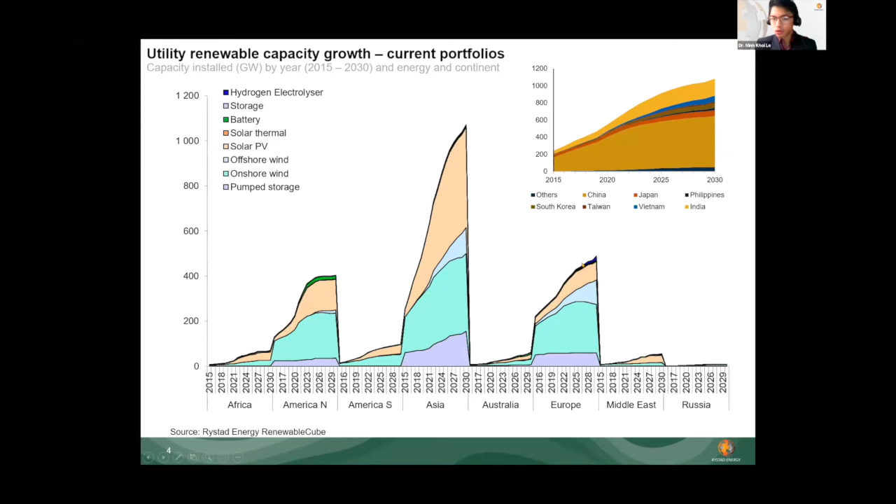Now you might see that, okay, we have hydrogen electrolyzer here, and it still has very small growth among all the regions, but you do see it coming up in Europe. And actually, when you take that part out of the mix here and just take a look at hydrogen electrolyzer, how do we see it grow in the future?

From the current projects that received financial close, FID, and the current projects that are in a very advanced stage, we still see them at a smaller scale. And that's why, until 2025, with cost still high and those challenges, we see it only reaching about 6 GW, but it can really ramp up after that, especially reaching quite a high number in 2030.

Keep in mind that some of this target and committed spending from countries, especially in Europe, for example looking at 40 GW by 2030, we still see cost being a challenge here, and we might not be able to get there in terms of the target. So if there are some positive changes in the cost of electrolyzers, but also the cost of renewables decreasing, then perhaps we can see this grow a bit more. But we do see a lot of countries already have committed spending in this regard.

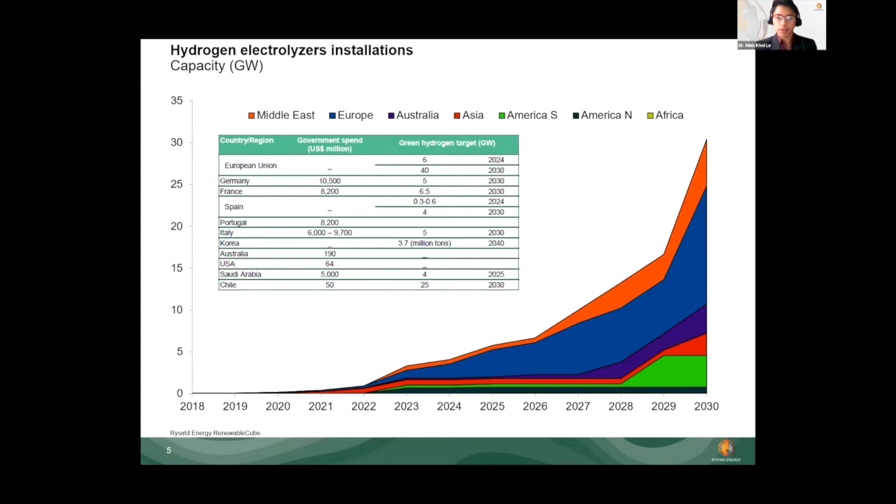We haven't seen much in terms of how they want to split this spending, whether to incentivize the demand side, or how much they're going to give in terms of grants. For example, we do see some grants coming out of Australia, but in other regions, it's still waiting to see how exactly these billions will be spent.

Taking a look here, if you plot the hydrogen electrolyzer facilities on a map, like we did before with other forms of renewable energy, we see the center being Europe, Australia, and a few more in the Middle East. But in contrast with what we saw before, with the renewable center of the world in North America and Asia, we don't have a lot of currently announced and committed hydrogen electrolyzer projects in the Asia region and North America.

In North America, with Biden coming in now, you might see a bit more, but blue hydrogen still represents very strong competition there. In Asia, you have quite high cost of renewables in certain countries like Japan and South Korea, and that's exactly why they are looking into other markets in terms of an importing scheme.

One center that we see is somewhat missing from this picture is China. Currently there's only about a 1 gigawatt size project in China that has come up, with a few other projects in the 100 megawatt range. These projects are quite few in number.

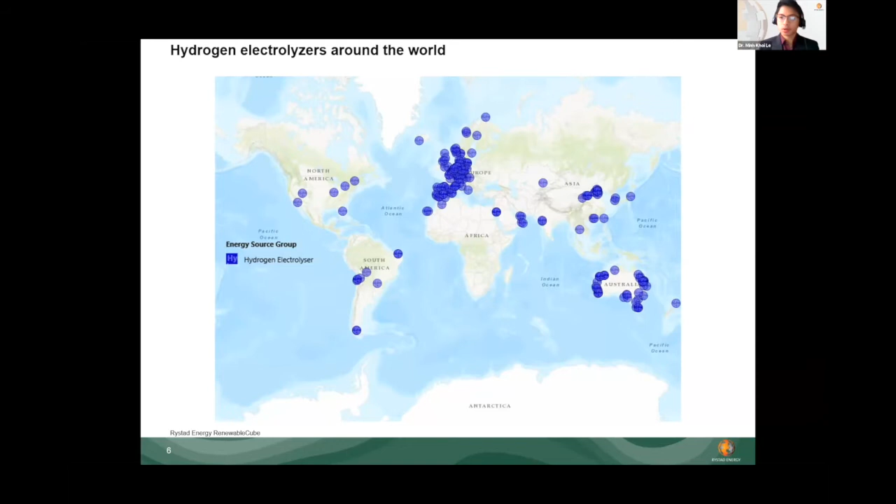But what's coming up now at the end of this month, and already in the plan for certain provinces, is the next 5-year energy plan. This is what we think will lead to a lot more facilities being announced, especially in regions such as Inner Mongolia, which is a hot state in terms of renewables in the world, with good resources for both solar and wind.

So taking a look at what is happening now, and at the past year, we went through a pandemic. If you take a look at how many hydrogen electrolyzer projects were announced last year, you're reaching the 40 gigawatt mark, compared to a total pipeline we're currently tracking here at Rystad of about 75 gigawatts. That accounts for more than 50% of the pipeline coming in from last year. So you really see that hydrogen electrolyzers and green hydrogen really kicked into gear in the past year, especially after the pandemic.

You can see here the spread of where these projects are: Australia with a huge number of pipeline coming from very big developments over there. You also see a lot of development coming out of Europe, but also South America, the Middle East, as well as Asia, where you do see this start to come up a lot more.

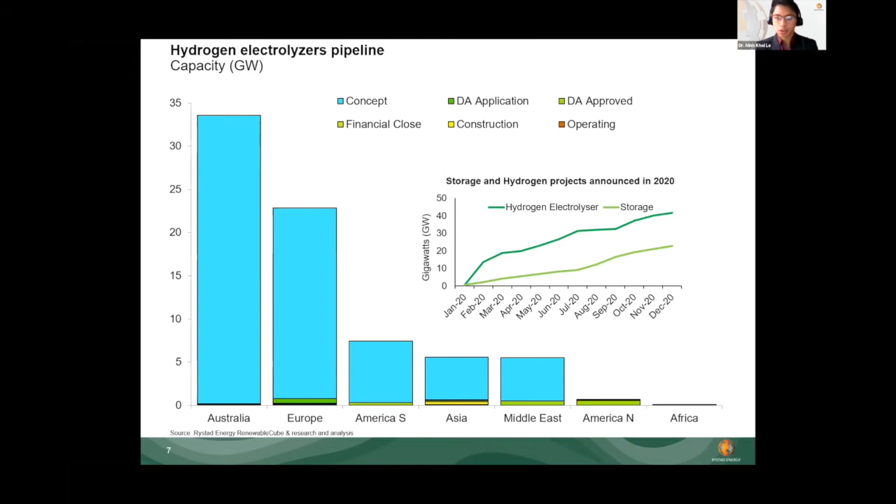So this is what we continue to track, and into 2021 as well, we already see some big announcements, especially in South America, where in Brazil, for example, they just announced a project. And exactly this is where we see, when we take a look at the top 10 projects currently in the world.

When you look at this, I think 4 or 5 projects here are coming from Australia. Of course you've got the Asian Renewable Hub, you've got the Murchison project, but you also have the Pacific Solar or the H2 Hub in Gladstone as well.

In other regions of the world, you have the Beijing Jingneng project, but we believe this will come up in phases. You also have the one I just mentioned, a project very recently announced by an Australian company called Enegix Energy in Ceará, Brazil. And you also see a few other projects in that South America region, like HyEx, for example.

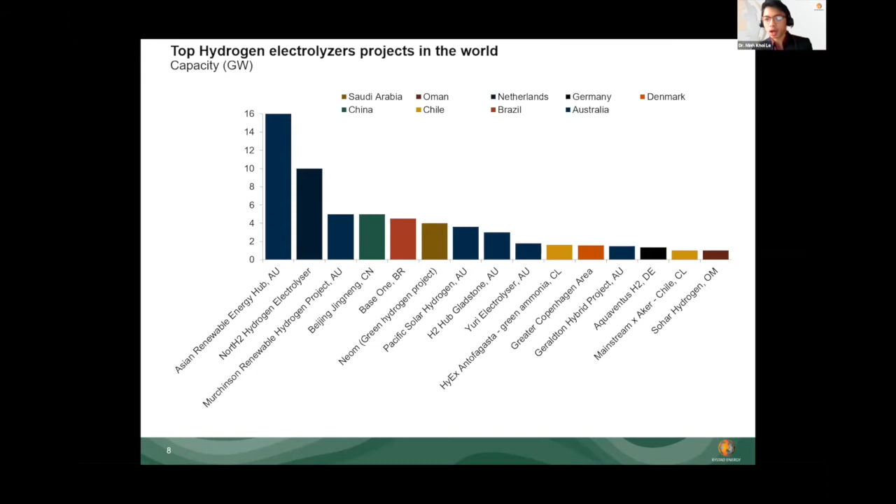Outside of that, some projects in Europe, like AquaVentus or the Greater Copenhagen area planned by Ørsted, or in Saudi Arabia, NEOM. So a lot of multi-gigawatt projects here, but I think we all agree these projects will come up later in this decade, or if not, past 2030.

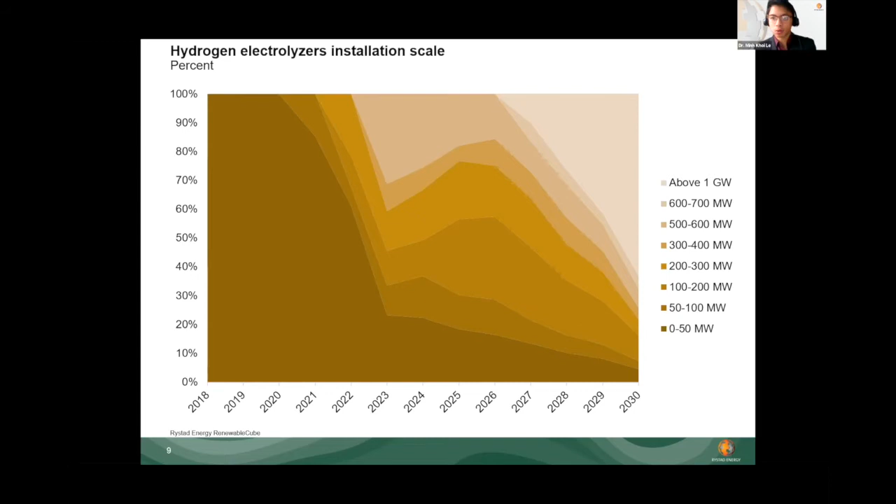When you look at the size, and how it's going to change in this market, we see the majority of smaller projects starting to come up first, and then slowly you'll see bigger developments as the supply chain matures and you figure out how the incentives work. This picture actually resembles other forms of renewable energy, where you start from a small base, especially on the solar side of things. You now see most solar farms around the world in the 100, 200, 300 megawatt range.

So looking outside of the projects, looking into more of electrolyzer suppliers around the world. Now, keep in mind that all these projects are in a very early stage, so they are mostly preferred contracts. But if you plot them, the top 8 suppliers in the world here, you have thyssenkrupp, Siemens, Hydrogen Pro, Hydrogenics who is now owned by Cummins, and Cockerill, who has a partnership there with Jingli.

You got Nel, ITM Power, and Sunfire as well. You do see a bit of mismatch in terms of pipeline here, with Siemens and thyssenkrupp having a very big pipeline. However, the two main projects that contribute to this pipeline, the Murchison project and NEOM project, are still very much in an early stage. So if we take those out, here's what the pipeline looks like.

And most of these projects will be below 500 megawatts. You do see a little bit of change in terms of ranking here, but we will see going forward how that process unfolds. Also note that you might see here there's mainly all European players on this chart. A lot of it is actually a mix between PEM as well as alkaline at the moment, with Sunfire being one of the only companies doing the SOE type of electrolysis. But Hydrogen Pro here partners with an alkaline manufacturer, Tianjin in China, and they're actually based in Norway.

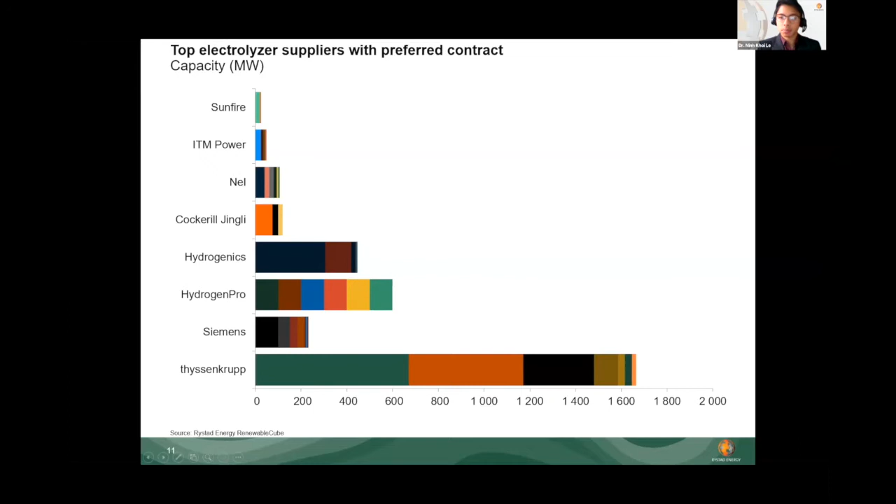So taking that outside, I think one ending note that I want to look at in terms of electrolyzer is, if you look at the current capability of manufacturing, they probably sum up to a little bit more than 3 gigawatts. So it's still very much a chicken and egg situation, whether there are enough committed projects there to really push this supply chain going forward as well.

And that is actually one of the major factors that we think can influence the reduction of costs in green hydrogen. If we take our installation case here of 6 gigawatts by 2025, and somewhat around 30 gigawatts by 2030, and we assume a certain learning rate, not so different from onshore wind or solar. And of course this learning rate varies depending on how advanced each of these technologies is.

Taking a look at that, we do see the electrolyzer cost decrease by 2025 and 2030, but still one of the main key factors to make green hydrogen competitive is the cost of the renewables feeding electricity to it. We do see LCOH of hydrogen reduced below the $2 mark, but that means, taking just the case of a solar PV farm attached to it, you need to be below $0.50 per watt in terms of capex to really facilitate this LCOH decrease.

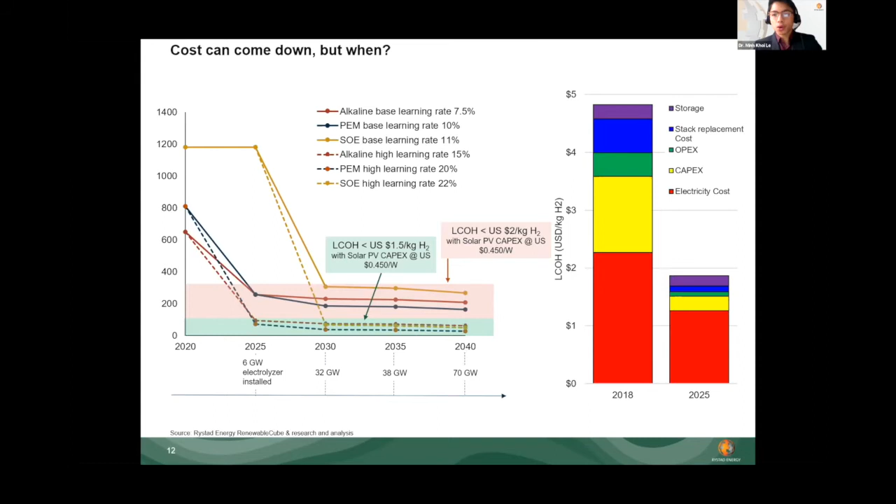So that is a very quick overview of the market here in terms of hydrogen electrolyzer. In the APAC region, we do have a lot of growth, and hopefully we can see some more production facilities for green hydrogen coming forward into the future as this industry starts to mature more. Happy to take any questions.

Thank you, Dr. Minh. That really showed us an overview of the hydrogen market and significant trends. And here we have some questions for you. The first one is about Vietnam: how valuable is hydrogen as a source of renewable energy in Vietnam, given its huge untapped solar or wind potential?

Thank you, thanks for that question as well. I have a background in Vietnam, so it's a country close to my heart. We do see very recently very strong growth in renewables in Vietnam, installing 5 gigawatts in 2019 and another 4 gigawatts in terms of solar in 2020, and we continue to see that number going forward. But what you need to take into account with Vietnam is it's still a growing country, a developing economy, so that means the energy demand continues to increase a lot. So it might not be the time yet for Vietnam to move into green hydrogen, but rather just do normal renewable energy, solar, wind, just to supply the demand.

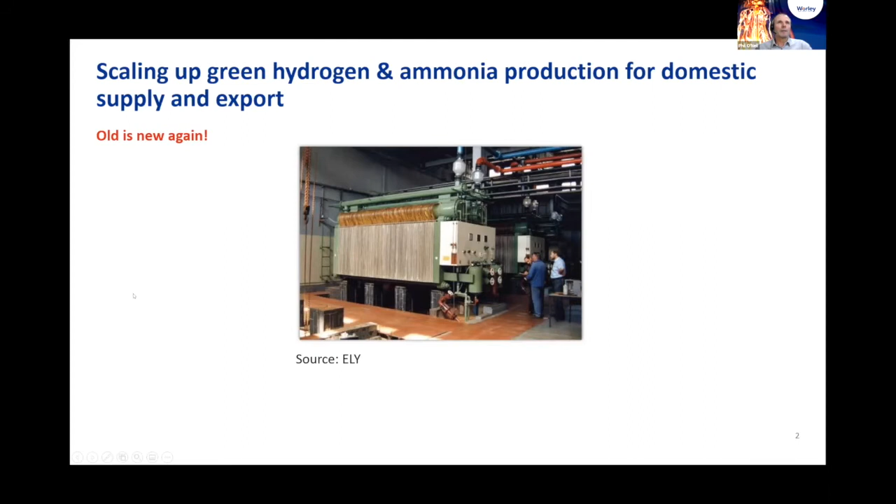But in Australia, there are some things happening. There's some pilot scale projects in implementation: an AGIG project in Adelaide, Jemena has a project in Western Sydney, Toyota has an eco park in Victoria, and Atco has a microgrid project in Western Australia - you're going to hear from Sam from Atco later in this webinar.

FMG are looking at testing a fleet of hydrogen buses in Western Australia. But then backed up behind these, we have a whole raft of larger scale projects, ranging from what you might call ambitious to audacious in scale. As an example, there's no less than 4 projects announced for Bell Bay in Tasmania, with big names involved such as Woodside, FMG, Origin, and Grange Resources.

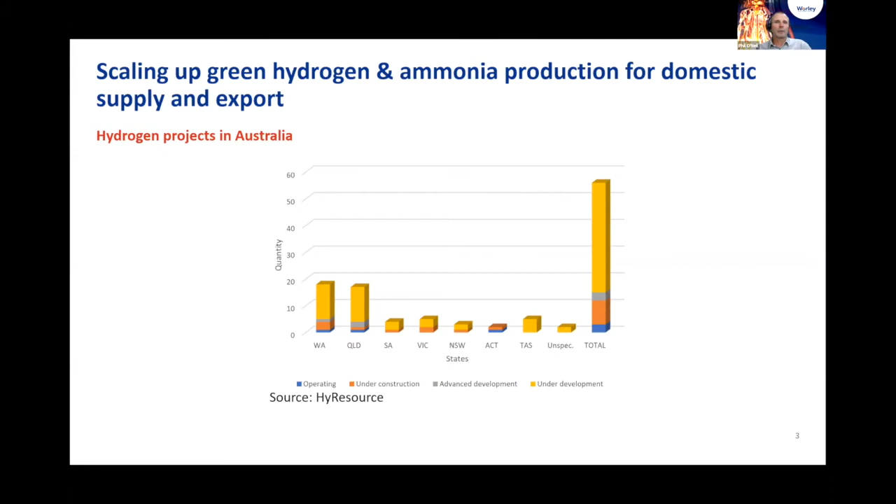But let's put all that offtake talk aside, because I'm going to focus on the production side now.

So why green ammonia? Ammonia is one of the most common chemicals in the world, and there's about 200 million tons of it made every year. It's used to manufacture fertilizers and other chemicals such as ammonium nitrate explosives, and is also used in water treatment. But what is under development now is ammonia as an energy vector - locking the hydrogen molecule into ammonia to increase the density and transportability of hydrogen. Ammonia has a lot to recommend it as an energy carrier: it has an international network of infrastructure and ships, as well as a depth of industry knowledge in its production and transport.

It can be used directly as a fuel to replace coal in power station boilers, or to fuel turbines and reciprocating engines in power stations and ships. But there are also challenges. It's a toxic chemical, although its safe transport and use is well established in an industrial context - you have to think about what happens if you start spreading it more widely than that. And ammonia's direct use in fuel cells is yet to be proven, although it is under development. Currently, a cracking process is required to create pure hydrogen for fuel cells, and that process is still emerging at scale.

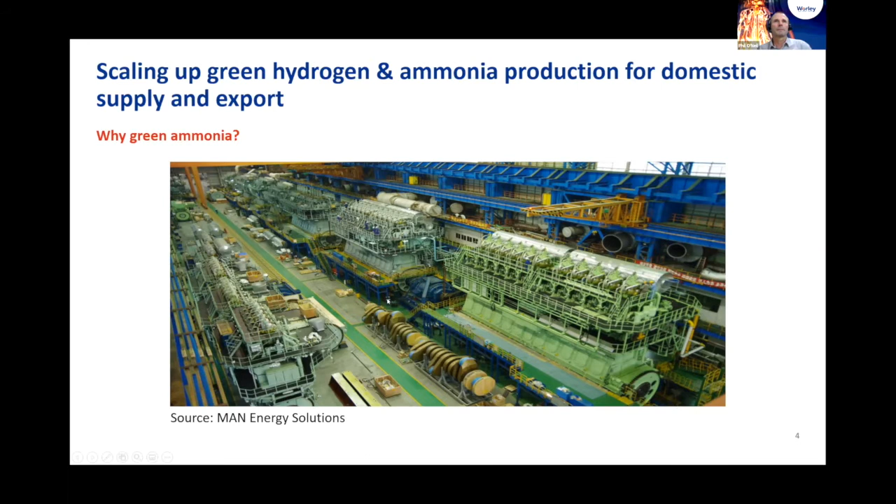So the cost of power and the amount you use to make hydrogen is a big influence on your final cost. In general, cheap electricity is available at lower capacity factors - for example, avoiding peak pricing periods, or direct connection to solar energy in the Australian context. Combined wind and solar plants give a higher capacity factor in most locations in Australia. Behind-the-meter installations at wind and solar farms can avoid costly transmission fees, but you have to think about where your hydrogen customer is - you'll need to deliver your product to where it is needed.

Grid-connected projects can take advantage of electricity market dynamics and commercial instruments, such as renewable energy certificates, to increase the capacity factor of the plant, if enough grid capacity exists. Grid augmentation can be expensive and delay project execution, so sometimes it's better to be independent. And note that as you reduce capacity factors to reduce your electricity costs, your equipment costs will go up as you have to produce the same amount of hydrogen in less operating hours.

And a significant portion of the operational costs are stack replacements after 60 to 80,000 hours of operation. Much work is occurring to make these membranes last longer and give higher efficiency, but it's also traded off against the initial capital costs. More stack area equates to higher cost, but higher efficiency and potentially longer life. As manufacturing costs come down, we can expect efficiencies to improve as more stacks are installed for the same output. In the short term, more efficient electrolyzers means lower power costs. It can actually be worth paying more to use less power. And I'll leave the discussion of hydrogen storage to Keith later in the webinar.

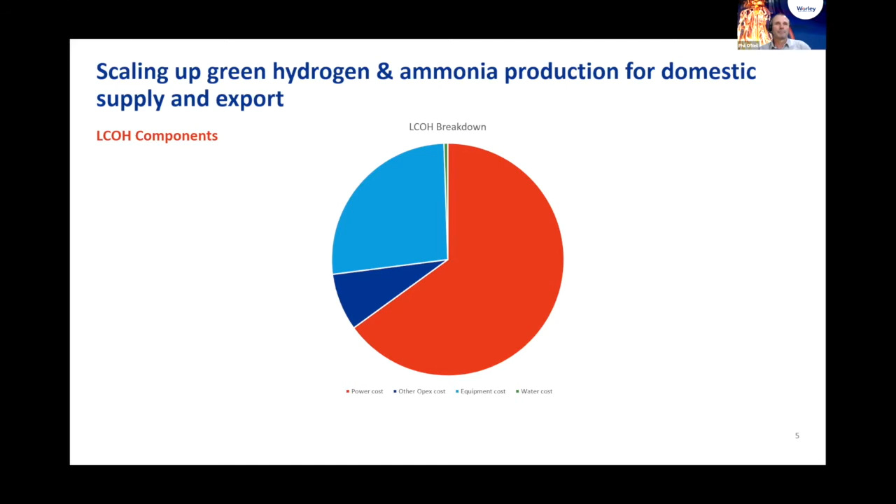So if you want to reduce the capital costs, you need to target the stack, of course. These are modular, and modules in factories are getting bigger to reduce costs. You also need to consider the balance of plant and other costs, and consider questions such as, what is the best scope boundary between electrolyzer vendor supply and balance of plant? Can you drive lower costs through doing all processes in a replicable fashion at modular scale, for example, 20 megawatts?

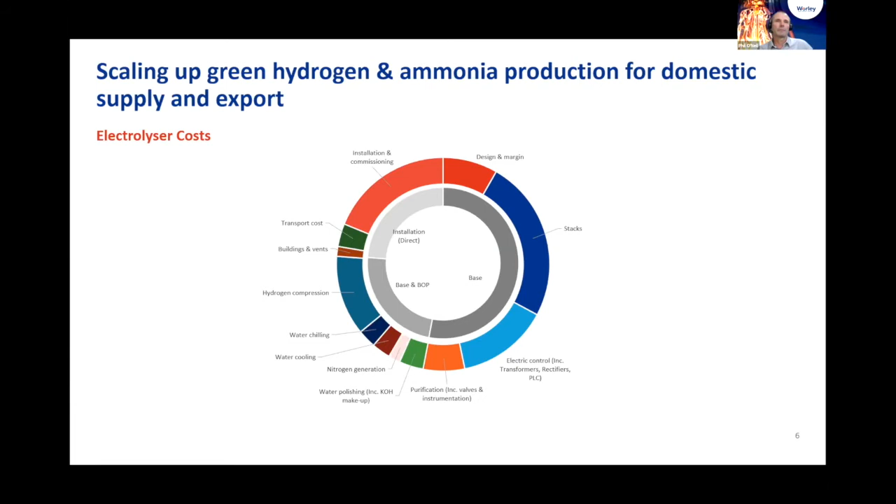Turning to ammonia plants now, this is an established technology. So what are the levers left to us? There are at least two that are being worked on. Larger scale to drive cost reduction. The largest capacity is now around 4,000 tonnes per day, equivalent to around 2 gigawatts of electrolysis capacity. This is a result of steady increase in ammonia plant capacity over many decades and much learning. These superscale plants aren't for everyone. You'll need a solid offtake and large backers to make this happen.

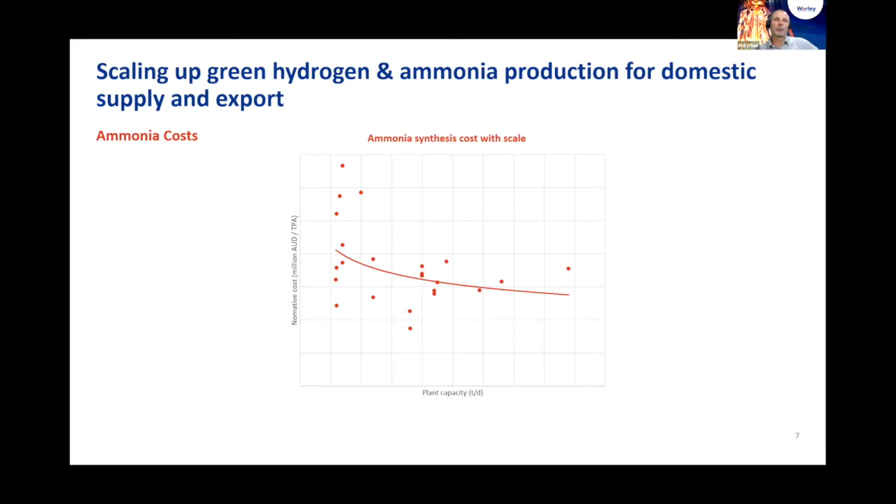Innovations in plant flexibility to match hydrogen production can reduce overall costs through less hydrogen storage and lower capacity factors, allowing lower cost electricity. Electric drives and careful control of the synthesis loop reaction temperature can allow faster ramping and a lower turndown. So having screwed down the costs, where do we focus to scale up green hydrogen and green ammonia in Australia?

So we want to aim for the bullseye of high value and large scale, bottom left-hand corner. So the highest value is in remote power. Hydrogen could offer competitive long-term energy storage in diesel-supported renewable systems and a pathway to zero emissions through a pure renewable and hydrogen storage solution. As the amount of energy that needs to be stored increases, battery storage becomes increasingly expensive. And in remote systems, there are daily and seasonal production and demand aspects to be balanced. However, these systems are often small, with mining being an exception, so the potential for scale up is reduced.

Heavy mobility appears to offer high value and potentially large scale, particularly with mining trucks and other back-to-base fleets. In fleets, hydrogen production and refueling costs can be shared across many vehicles, removing one of the key barriers to uptake. However, it is a big commitment to convert a whole fleet over to hydrogen, and many demonstrations will be required before it's bankable technology. So the purchase of individual trucks is not going to get us to scale, but can create the demonstration pathway.

Export is a real opportunity subject to those offtakes I mentioned earlier. With ammonia as the vector, energy could be shipped from Australia to other nations to supply their low emissions energy needs where their domestic resources are limited. And ammonia as a product, energy storage, shipping, and rail freight could also offer value and scale, although rail freight still has some technical challenges to address before becoming mainstream.

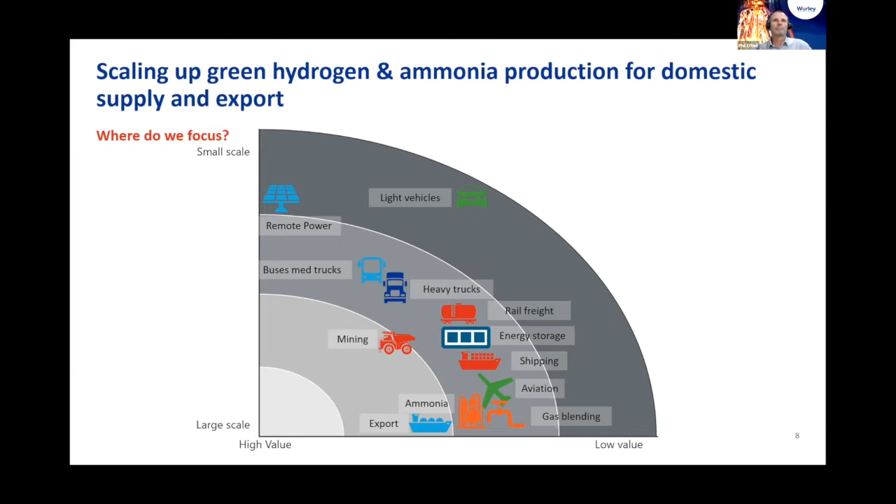Thank you, Phil. You really showed us great insights of the green hydrogen and green ammonia production and their upcoming trends in this emerging energy supply chain. And also here we got some questions for you. The first is, what's the size of the future PEM electrolysis market, and what's the latest technology trend for the electrolysis?

Okay, thanks, Chris. Definitely the dominant technology in terms of large-scale plants at the moment is alkaline. It's offering lower costs and higher efficiencies at this time. But PEM technology in the future could offer, depending on getting production costs down very quickly, even better efficiency than alkaline at a comparable or maybe even slightly cheaper cost.

Let's shoot for comparable. And potentially offer some flexibility advantages and allow, as I mentioned about low cost electricity, you to respond to electricity signals and potentially play different electricity response markets to lower your overall cost of energy into the plant. So in terms of the latest trends, well, the solid oxide electrolytic cell has had some news this week with Topsoe announcing developing a factory to produce those cells. But the ongoing theme is of fast development and fast scale up, and hopefully prices coming down very quickly.

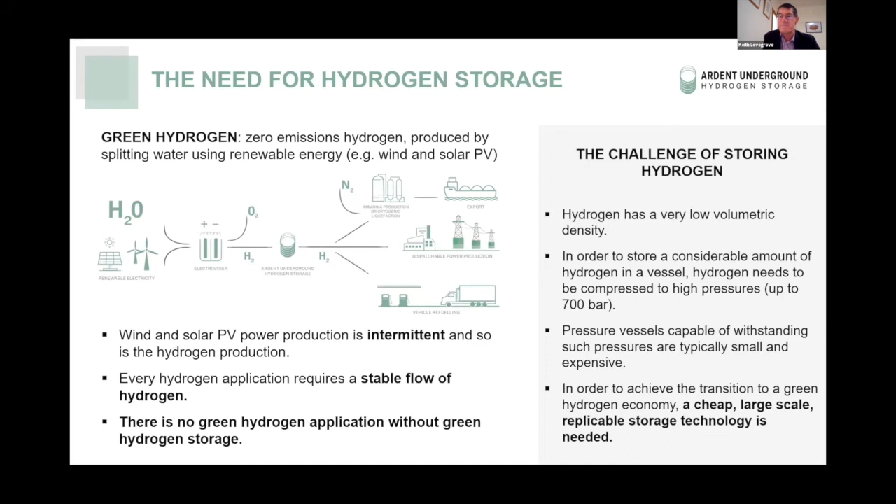But every usage for hydrogen requires a stable flow, or indeed an on-demand flow, certainly power generation, vehicle refueling, and indeed, in the case of the export, what's needed is a stable flow of hydrogen to feed, for example, the ammonia production. And I certainly agree that ammonia production seems to be the most sensible export vector. But even if it's cryogenic liquefaction, that's also going to be something that won't run intermittently. So we know that hydrogen itself has a low density. It needs high pressures for storage. We certainly have pressure vessels for this, but really, if we're going to think about this long-term large vision for hydrogen, we need storage that's on a commensurate scale to the vision of production that's talked about.

So let's put that into context. A Toyota Mirai, an available fuel cell vehicle, has a very high-tech carbon fiber-based tank, and stores maybe 4 kilograms of hydrogen. If in Australia we wanted to support all the ammonia production existing today with, say, a 2-day buffer, well, that jumps to 3,000 tonnes of hydrogen that would need to be stored. If we look at all of the currently proposed large-scale export projects and said they might need a 2-day buffer, that's 23,000 tonnes of hydrogen that needs to be stored at any given time. And then if we went on and said, look at Australia, what if we provided 30% of our electricity and we wanted that available for a week?

And similarly, what if we move Australia's transport energy? It's a very big and tense discussion to think how transport is going to evolve in a decarbonising world. There are certainly people who would argue it's all going to be battery vehicles, but maybe that's for inner-city commuting. If you look at Australia, we've got a huge need for long distance transport, not to mention aviation and shipping.

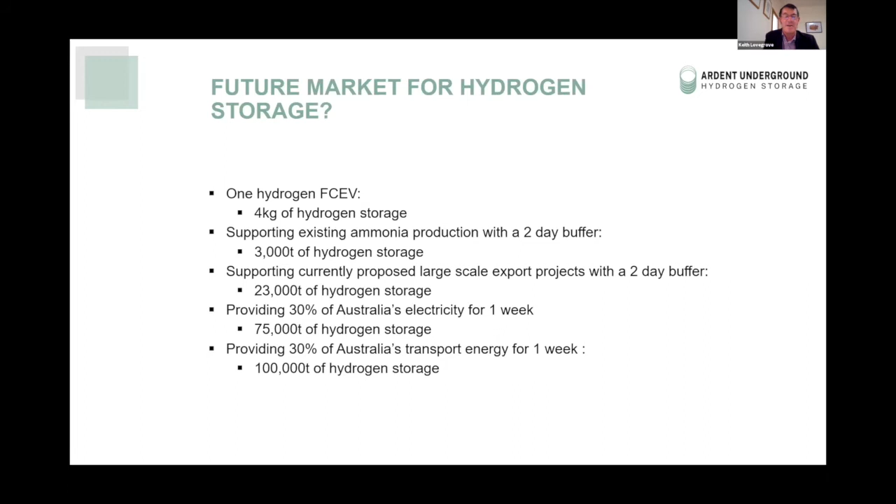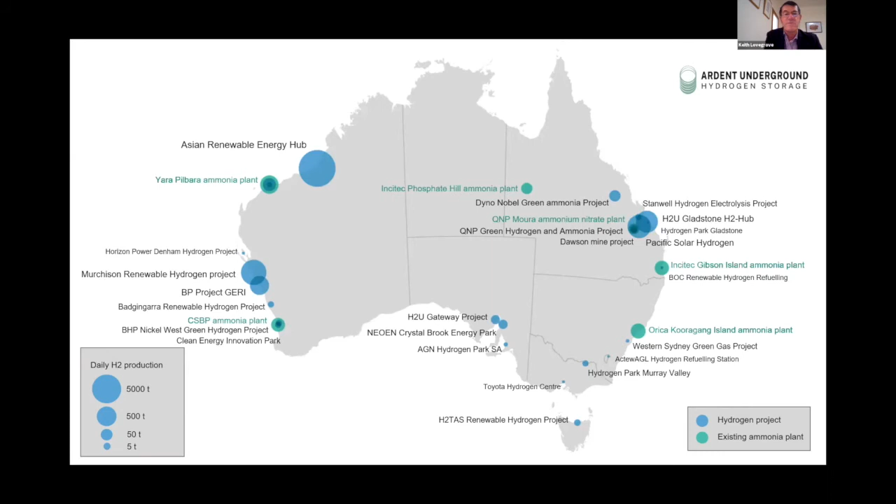So what can we do to store hydrogen? Well, of course, there are pressure vessels, large and small, but they're not going to get us too far, really. One of the best and most cost-effective solutions that is proven is the idea of a salt cavern.

This is a technology, for those of you who are familiar with it, you'll know it. For those who haven't heard of it, it's quite a surprising thing to think about. It's done at considerable scale in Europe and North America for natural gas and oil storage. The basis of it is that there are large underground salt deposits, depending on the geology, that have occurred over millions of years. One can bore down and solution mine caverns as big as skyscrapers and store massive amounts of gas.

And it turns out salt caverns like this are very good at storing hydrogen and very cost effective. The problem is you don't always have a salt cavern where you want to build your project. In Australia, there's only 3, maybe 4 large salt deposits that I know of at least, and they're not necessarily in terribly convenient places. So it's great if you can get it.

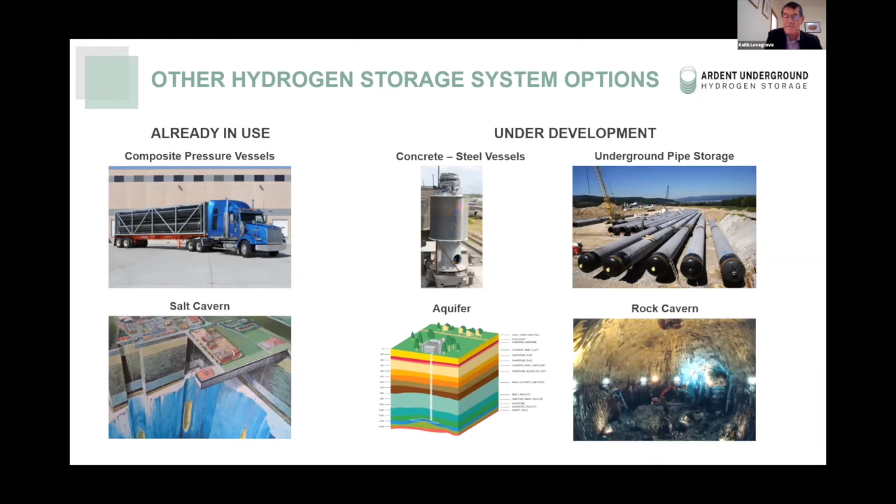So it's challenging. What I want to do today, apart from talking about the general background, is introduce you to Ardent Underground's plans, which is to come up with a low-cost, replicable, large-scale, small above-ground footprint approach to a lined rock cavern.

And the way we're doing this is adapting a technique from the mining industry called blind bore shaft drilling. For those of you who are not familiar with it, it sounds like a reasonable term, but the key point here is that the shafts that are drilled are anything up to 7.5 meters diameter. The technique is applied in the mining industry to construct access shafts or ventilation shafts for underground mines, and it's a very big drilling process indeed.

It can certainly go down to 500 meters, maybe more in the long run, and that gives us really quite a large volume as a vertical shaft, as a hole in rock. In the applications applied in the mining industry, the shaft is initially made and then lined with a casing whose job in that application is to stop groundwater running into the mine and also to stop the shaft caving in any way.

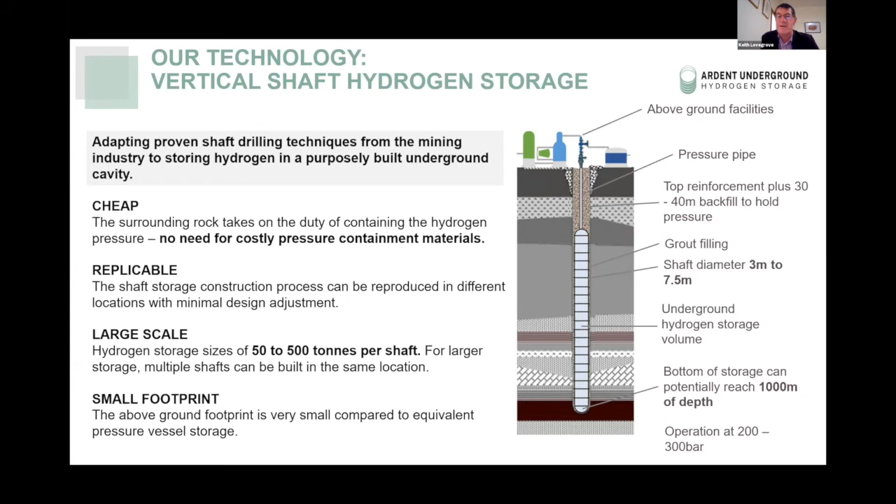So radially, the pressure is contained by the rock. At the top, the pressure is contained by this plug that's added later. So we're contemplating anything up to 300 bars using this approach.

A bit more here on the steps to construct it, a 4-step process, if you will. The shaft is drilled. In fact, the shaft drilling is carried out with the entire shaft filled with water, and the next slide will show a bit more detail on that.

Once the hole is in place, the casing is assembled by joining prefabricated elements, welding them on, and gradually sinking the casing down into the water by transferring water out of the shaft and into the center of the casing to keep it semi-buoyant. This proceeds until it's finally finished off with the top dome, and then a process of grouting to lock it all in place.

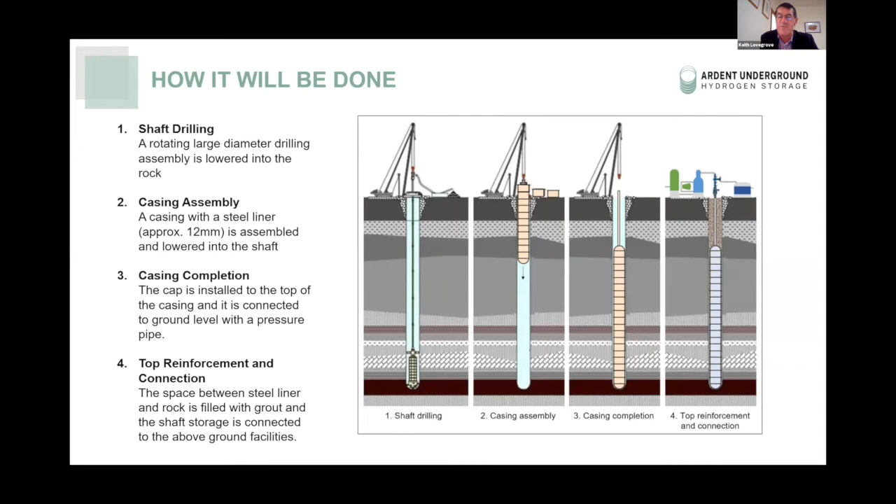I emphasize again that the idea here is that the casing does not hold the pressure. The casing simply stops the hydrogen from leaking out, and the grouting transfers the pressure forces to the rock. The rock holds the pressure.

This gives you an idea, a bit more detail on how the blind bore shaft drilling works. The schematic on the left shows you the process, the drill string turning a single very large drill bit at the bottom, and a process of air injection into the inside of the drill string, causing a large upflow in the water, which lifts out all the rock fragments and brings them to the top into a settling dam.

The picture on the top right is one of the drill bits. The bigger picture is a coal mine site here in Eastern Australia, and you can see the people in the centre for some scale and some vehicles and the casing elements there.

So this is a proven technique in the mining industry, and what we need to do is prove that we can adapt this and hold gas without leakage.

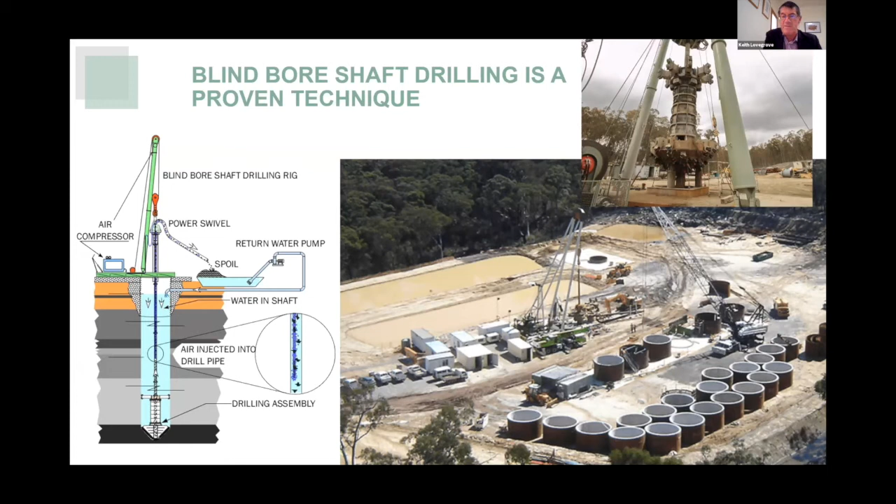So the critical point here really is how much will it cost, in terms of an installed cost. The storage is really essential, and the cheapest storage will win. I've made the point earlier that nothing really beats a salt cavern if you can get it. It is a very, very large thing.

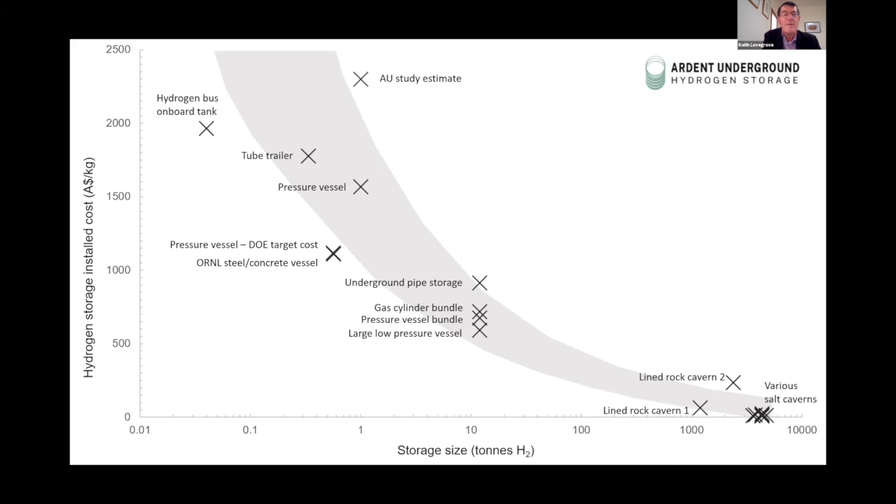I just point out that the horizontal axis there is logarithmic, taking us from vehicle sizes right out to massive sizes, and so our niche there is the 20 tonnes to 500 tonnes kind of niche.

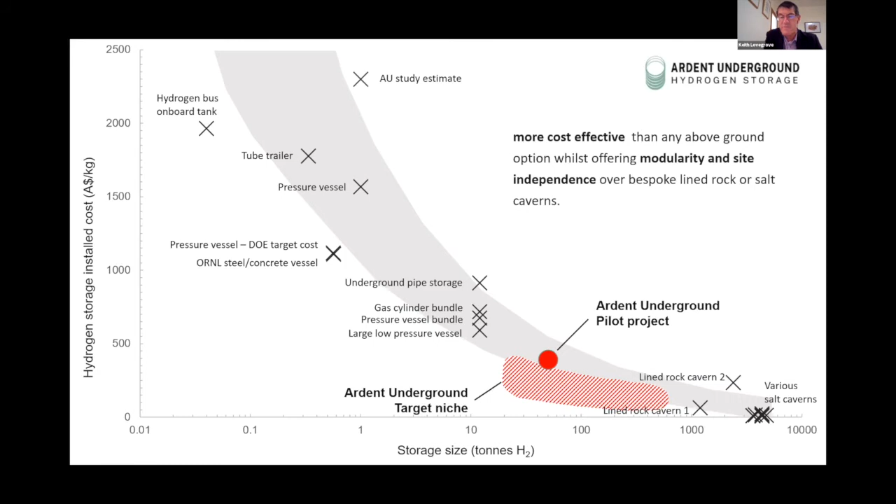This has not yet been proven, so we're in the process now of working towards the first pilot. Our first speaker today really outlined the timeline of this global hydrogen industry, and it's really a 2025 to 2030 acceleration of the industry. What we're trying to achieve here is to take this new storage technology and have it completely ready and proven by 2025, so that it can follow along with some of these fairly large projects that are talked about. So we think it's quite a promising idea in terms of the economics.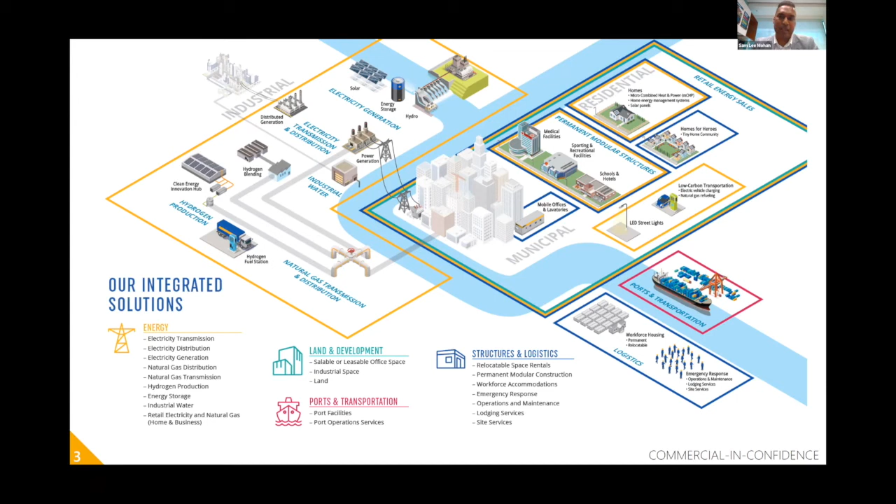Just a snapshot of some of the assets. We obviously have Australia's first green hydrogen microgrid, which we commissioned in 2019 in Jandakot, just south of Perth. And we are also working on under construction refueling stations here in Western Australia, as well as blue hydrogen production and blending in Canada, replication projects over in the US as well. But just from a snapshot perspective, we own ports in Chile, Neltume Ports, as well as electricity infrastructure, poles and wires, as well as generation assets. And in Canada, we also retail energy.

So I wanted to just give you a high-level view of strategies. I'm just going to move this out of my way.

As I mentioned, Atco owns and operates almost 14,000 kilometers of pipelines here in Western Australia and 64,000 kilometers globally. The gas networks is fundamental to our strategy, and it's about preservation of the assets, but also fundamentally with preservation of the asset come decarbonization. So our strategy firmly grows from the core of utilization of these assets, and hydrogen and other clean fuels like biogas plays a fundamental role in the decarbonization of not just our assets, but our energy future.

So just a bit of history. In 2016, we developed what was called the GasSola project. The GasSola project is rooftop solar batteries integrated with a natural gas-fired generator to provide real-time energy balancing. And what that did was it really gave us a solid foundation and understanding of the role of natural gas assets in the future energy mix.

The next logical step for us was to grow that out to a commercial scale and really simulate how we can harness spill energy. So how can we harness energy that's created through intermittent sources, solar, wind, etc., capture it, store it, and use it in our existing asset base. So we conceptualized, engineered, constructed, and commissioned the Clean Energy Innovation Hub in 2019. And we've successfully blended 10% of hydrogen in the natural gas microgrid network in Jandakot.

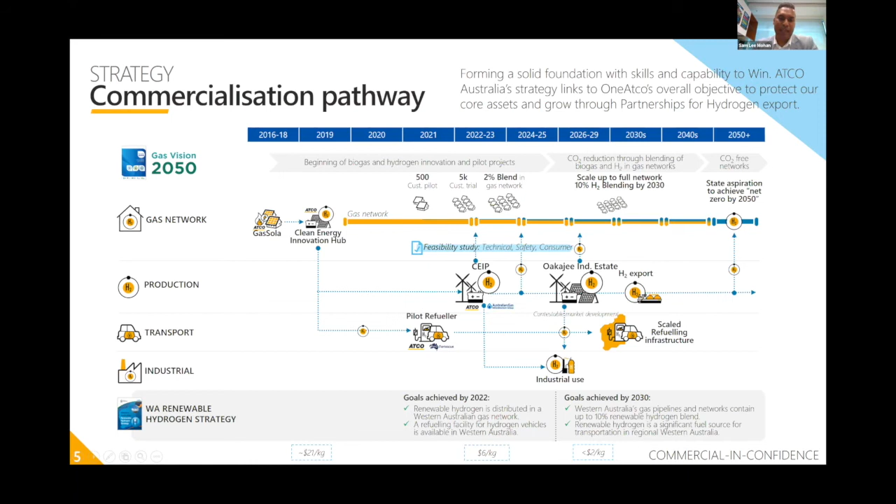But from a Canada perspective, gas is really cheap, just like in Western Australia. We've taken a very hard look at blue hydrogen, and we believe that we can produce some of the most competitive in the world blue hydrogen. We own production and storage assets, SMR and carbon capture and storage. We own salt caverns as well as the distribution system, port terminals, and with existing infrastructure and trade routes, established trade routes, we believe that we can provide them at really cost competitive.

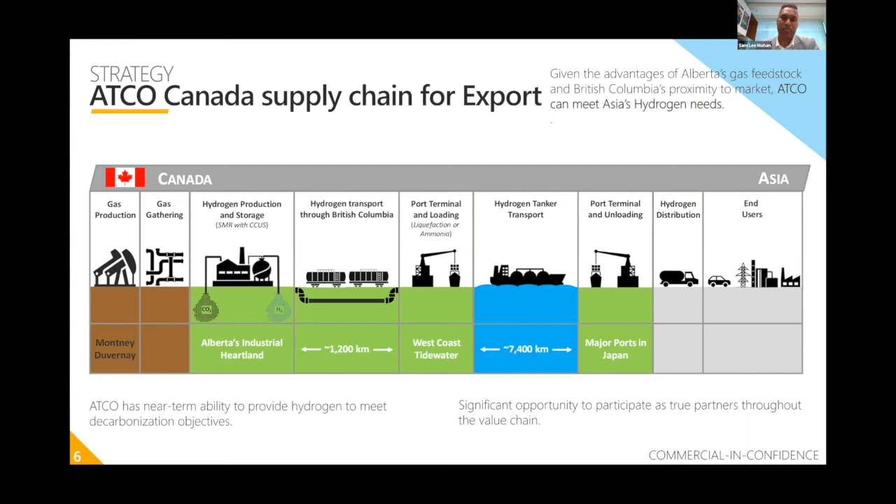In Chile, we're working on a proposal for production and refueling. Here in Australia, we've developed the Clean Energy Innovation Hub. We are in a joint venture with Australian Gas Infrastructure Group, developing Australia's first 10 megawatt hydrogen production plant called the Clean Energy Innovation Park. And under construction is the refueling station as well.

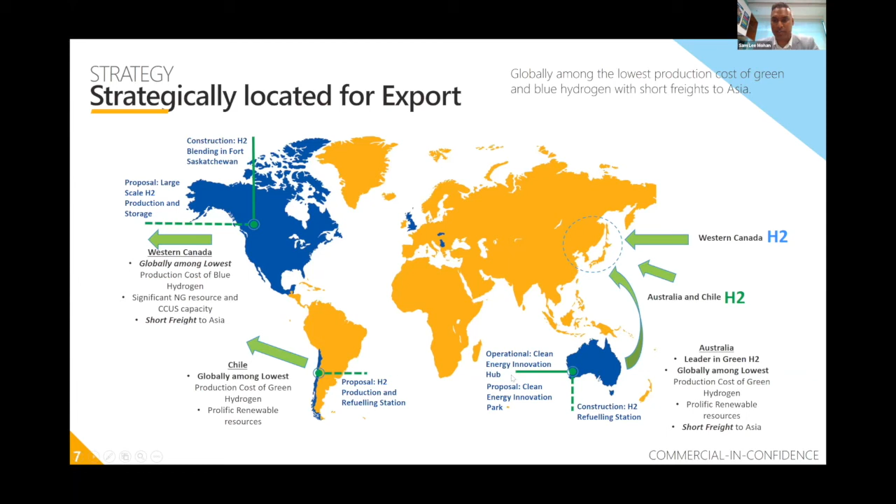Importantly, and I'll touch on why we think that's important in a few moments, but just to give you a snapshot of strategy in action...

We developed Australia's first Clean Energy Innovation Hub, which is a 23-ton per year hydrogen production plant, dispatchable in real time, and it's fully integrated with a standalone power system that's currently operational.

The standalone power system has a combined capacity of just under 1 megawatt of power. We've got a dispatchable hydrogen production plant where we produce about 10.8 kilograms of hydrogen per day with 4 hours of sunshine.

And again, to the point the previous speaker made, in this instance you can actually follow through when the electron was produced, how it was produced, and how it flowed through into converting it from an electron to a molecule.

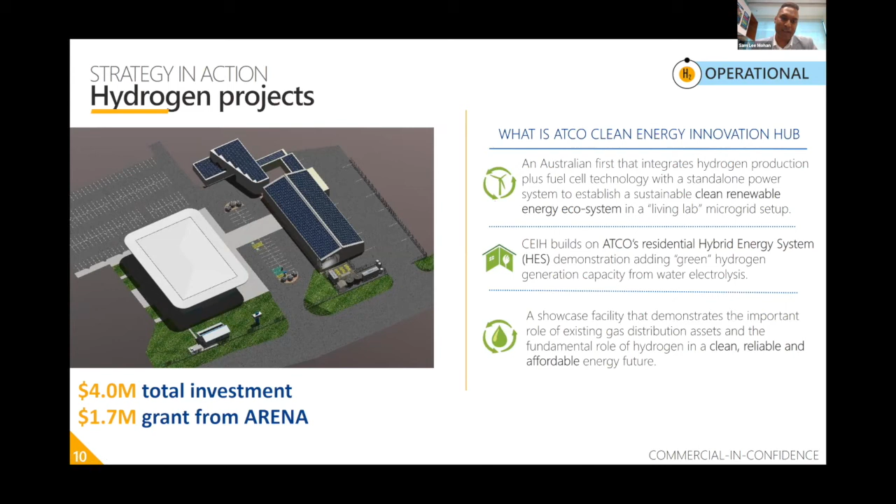On our site, we are then using that hydrogen for blending and testing. We've also got a residential 4x2 home on the site where it's integrated with a fuel cell, providing essential backup power back into that home.

This is a snapshot of real-time data from the system and how it's operating. On the dials, you'll see on the top solar producing at that given point in time 97 kilowatts. The way the system is designed, it never produces more than what it actually needs.

At any given point in time, if the batteries are full, which you can see in this instance, it's 457 kilowatt hours, pretty much full. The site is only consuming around 90 kilowatts, so we didn't have to produce any more.

At that point, our storage was where we wanted it to be, just under 8 kilograms of hydrogen being stored in there, so we didn't have to produce at that particular time. The site was on 100% renewable energy at that given point in time.

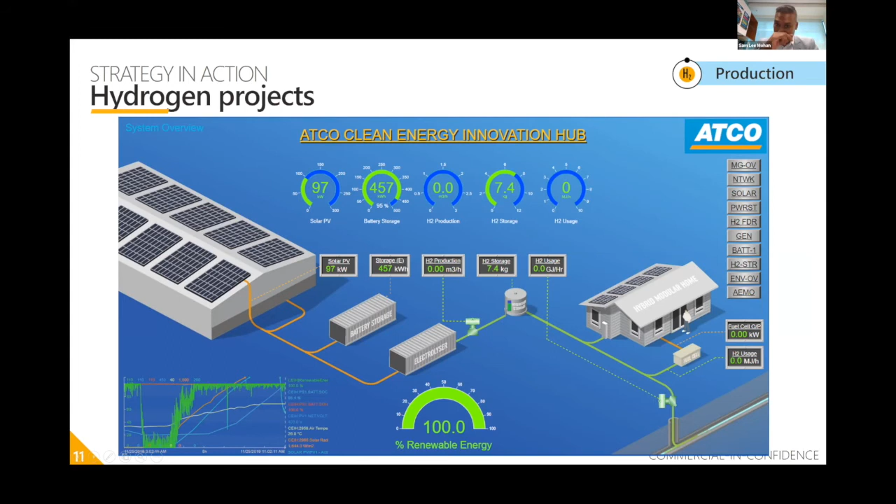So why does Atco think it's feasible? We developed the Clean Energy Innovation Hub, and we know that hydrogen was produced at that point around $21 a kilogram. The Clean Energy Innovation Park, which is the project we are now looking at, the 10 megawatts...

We know we can produce the hydrogen at quite competitive prices, and for commercial reasons I won't mention the price on this call. But importantly, what does the future look like, and can you actually get down to a commercially competitive rate in the future?

We've completed a study funded by the WA government in partnership with Atco, and the pathway is a credible one. One of the bookends we looked at is, even if you had zero cost electricity spill, can you actually produce hydrogen at under $2 a kilogram to be globally competitive?

And the answer is no. Even if you had zero cost electricity, you're still at around $3 a kilogram.

But do you actually need the electricity to be zero? What are the other major levers, like stack performance and cost of capital coming down? When you actually look at the perfect mix of all these key triggers, the pathway is feasible.

And it does actually come down to less than $2 a kilogram. Today we are competitive with diesel, and in future we'll be competitive with natural gas, both on the East Coast and West Coast.

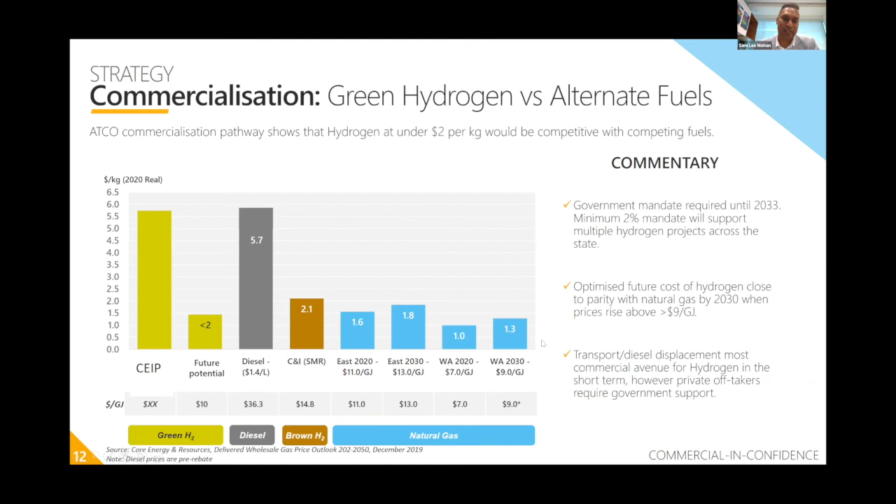A snapshot of the Clean Energy Innovation Park: it's a 10 megawatt hydrogen production plant, producing 4 tons of usable hydrogen per day.

The hydrogen will be stored in stationary storage vessels at 300 bar, and we'll be using virtual pipelines to transport the hydrogen to our injection points in the gas network.

And the future of the system will also provide essential hydrogen for transport. So we are working with bus consortiums at the moment to provide the hydrogen for transport...

...as well as working with an industrial user to take hydrogen from the Clean Energy Innovation Park. And the future benefits are, let's not forget about oxygen.

As these plants start to scale up and we hit between 50 and 100 megawatts, it starts to become feasible to liquefy oxygen and transport the oxygen as well, which then offsets your economics and brings the price further down.

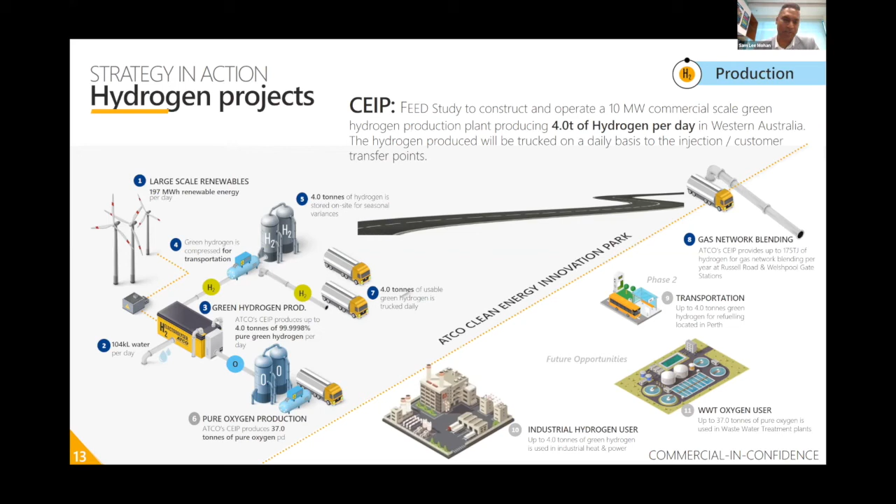Some timing for the Clean Energy Innovation Park: by the end of this year we'll have completed our... at the end of 2020 we finished our FEED study.

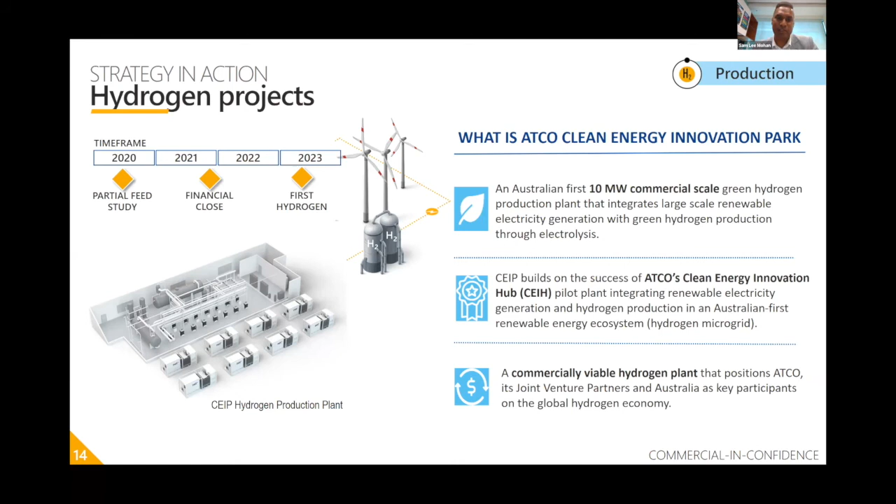And by the end of this year, we are looking at final investment decision and first hydrogen Q1 2023. In the spirit of time, I'm just going to race through the next few slides.

The Clean Energy Innovation Park, as I mentioned, was partially funded by the WA government, $375,000, without which we couldn't have achieved the outcomes. It'll be producing 4 tons of green hydrogen per day, building on our experience, and we are one of 7 shortlisted projects under ARENA's $70 million renewable hydrogen deployment round.

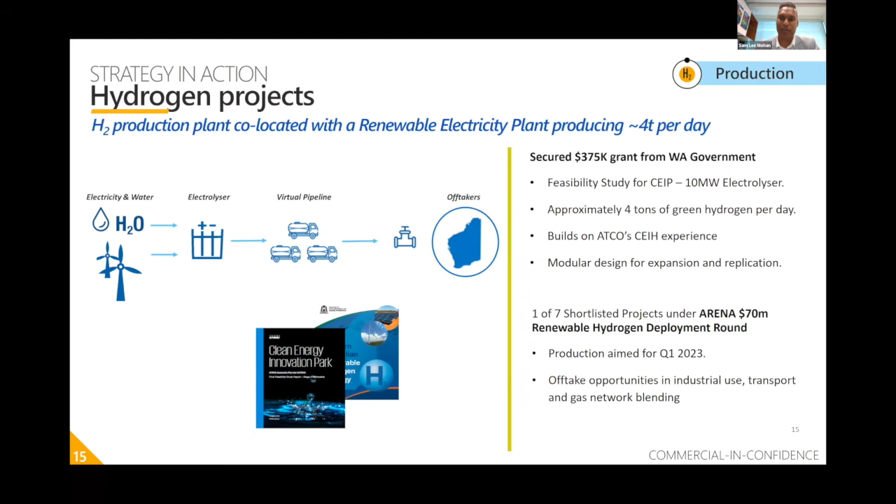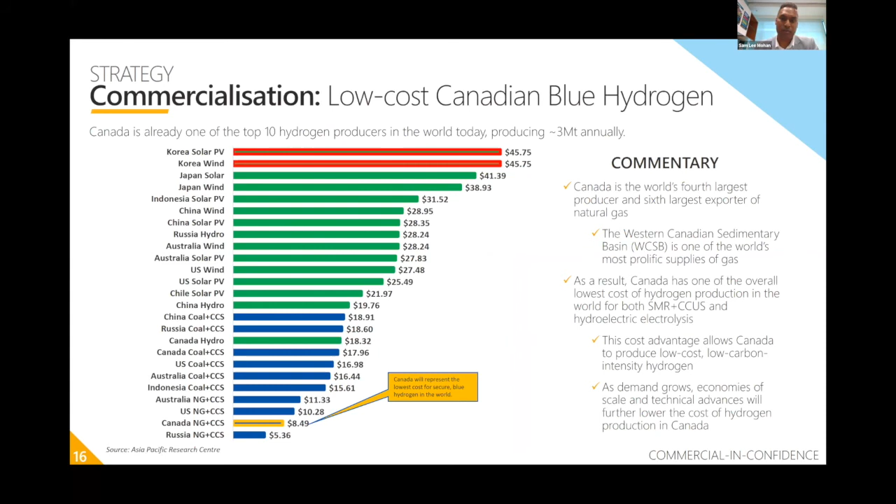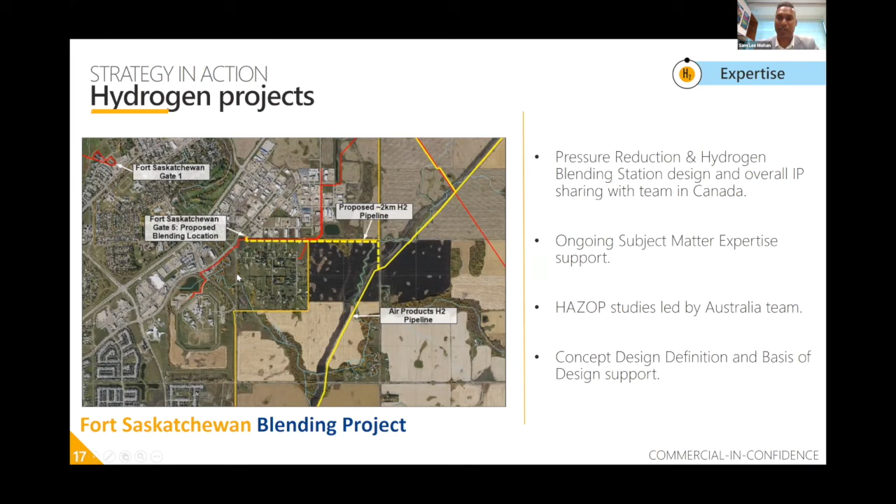This is a snapshot of our Fort Saskatchewan project, where we are producing blue hydrogen and blending it via a rig that we built here in Australia, a pressure reduction and blending station as part of our Clean Energy Innovation Hub project. So the same technology is being exported and used in Canada, where we are mixing it with natural gas and blending it into the Fort Saskatchewan network. The project's under construction. There's lots of other projects that we are working on, but in the spirit of time, I'll leave it there.

Brace, back to you. Thank you, Sam. Thank you for your presentation. And here we got some questions for you.

And the first one is, what would be the trend moving forward for green hydrogen in the medium to long term? Yeah, it's sort of a broad question. I think the gas networks will become fundamental to building domestic demand alongside transport.

From a gas networks perspective, it's a sunk asset. It distributes almost 25,500 terajoules of energy per annum just here in Western Australia. And it's an investment that's already paid for by the end users. It makes perfect sense for us to continue to use these assets as part of the future energy mix. And what that means is that there's policy barriers. There's policy that needs to be implemented that allows us to blend and recover accordingly, because early mover projects are coming at a premium price. So the right policies and incentive mechanisms are going to drive domestic demand.

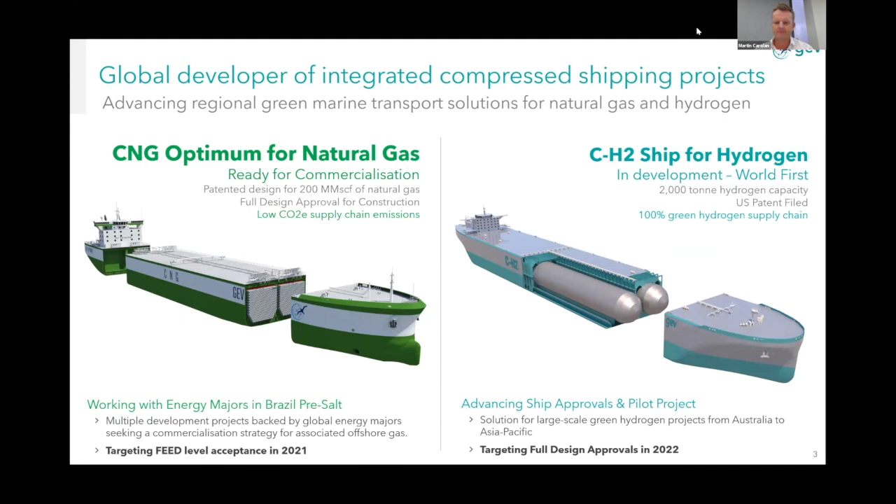So one of our activities last year in investigating the approach to transport was trying to search out where the market was at, and it seems as though from a shipping and transport perspective it is still in its infancy. We've really only seen the introduction of a small pilot demonstration ship in the form of liquefaction from Kawasaki Heavy Industries. We've seen evidence of Hyundai looking at a liquefaction ship. Obviously, ammonia is currently being shipped today. And so we've looked at the application of compression.

So this is our C-H2 ship in terms of its specification, as I mentioned. We launched last year a program with the American Bureau of Shipping to go through the first stage of what's called the approval in principle. And that's really to look, from a regulatory design point of view, an engineering point of view, and a hazard point of view, that there are no safety hazards that cannot be either mitigated through design or other methods, to ultimately seek approval for construction.

So we are expecting that approval in principle imminently. And so that then sets the roadmap for the next 12 to 18 months to go through a series of engineering and prototype testing activities to then come to the formal decision of approval for construction. As I've said, we've lodged a patent application that's been filed.

So this ship is designed to take 2,000 tons. It's quite a large ship. Think Q-Max level from an LNG perspective, roughly 300 meters long. The two tanks are 20 meters in diameter. They are nested with multiple layers. We have IP around that. So at this stage, we haven't gone into too much detail how that sits, but they are essentially two 200 meter length pipes that will store at pressure of 250 bar.

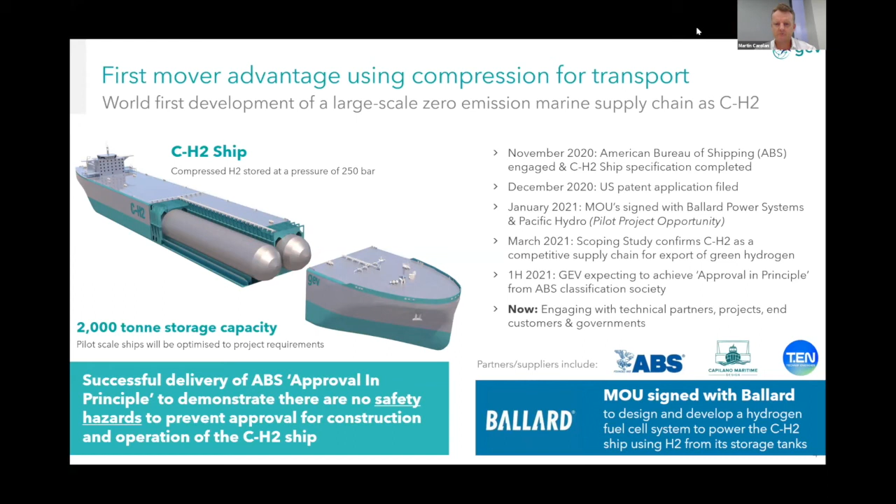We're currently focused on the Asia Pacific, and already today we've heard some great presentations around the demand and obviously the supply side. So obviously Australia leads the world with a national hydrogen strategy. It has, as we've heard today, 5 of the world's largest green hydrogen projects globally. We have a well-established hydrogen strategy and obviously an abundance of renewable resources. Those resources are all ideally suited to the production of hydrogen.

And so cost obviously is one factor that needs to be driven down. We've heard quite a bit about that today, but definitely on a competing cost basis. So we're in a location with the largest green projects with access to the key markets from an Asian context. And obviously we're at the low end of the cost curve and seeking to drive that lower. So we are now aiming to put forward an alternative transport supply method using compression and seeking to export large scale tons of hydrogen from the northwest part of Australia up to Singapore, South Korea and Japan.

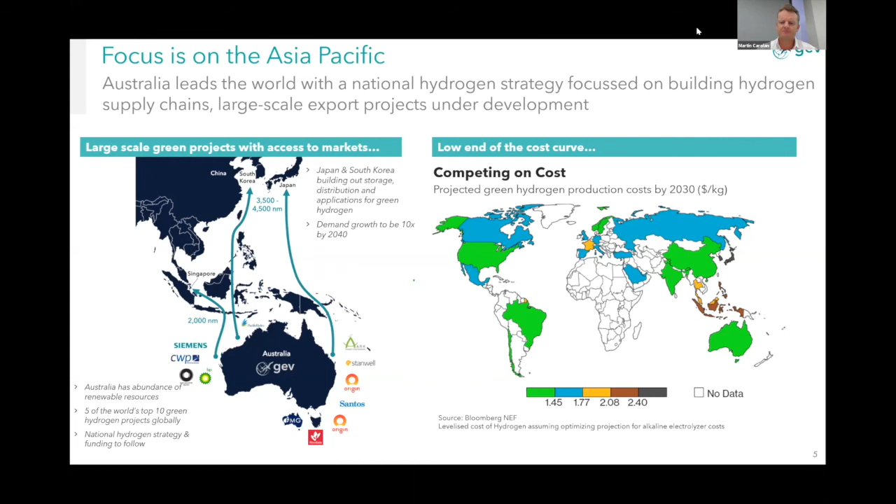So we're just going to briefly go through the concept of our supply chain. So when we talk about a shipping and transport solution, we also include the compression for loading and obviously decompression for unloading. So our supply chain is simple and our objective was to be as energy efficient as we can. So we obviously leverage the application of compression, which is used already. We've heard a number of attributes today where compression is applied from an onshore perspective. Compression also exists in each of the integrated supply chains for both liquefaction and ammonia.

So all we do is 3 simple steps. We take the produced hydrogen in a gaseous form. We can compress and load that green hydrogen directly from the electrolyzer to the ship using compression. We load that to an operating pressure of 250 bar. And the ship is always berthed at port. So we heard some earlier conversations around storage. So effectively, we use the ship as storage. So we don't have a storage requirement at the loading end, and indeed we directly load in or load out at the customer end.

So from the shipping point of view, we store and transport in its pure gaseous form, and as we said, an operating pressure of 250 bar. So the ship that we're looking to seek approval for in the first instance has a capacity of 2,000 tonnes. That ship is powered by electric drive engines with onboard fuel cells, and that fuel is directly coming from the hydrogen which is contained in our cargo.

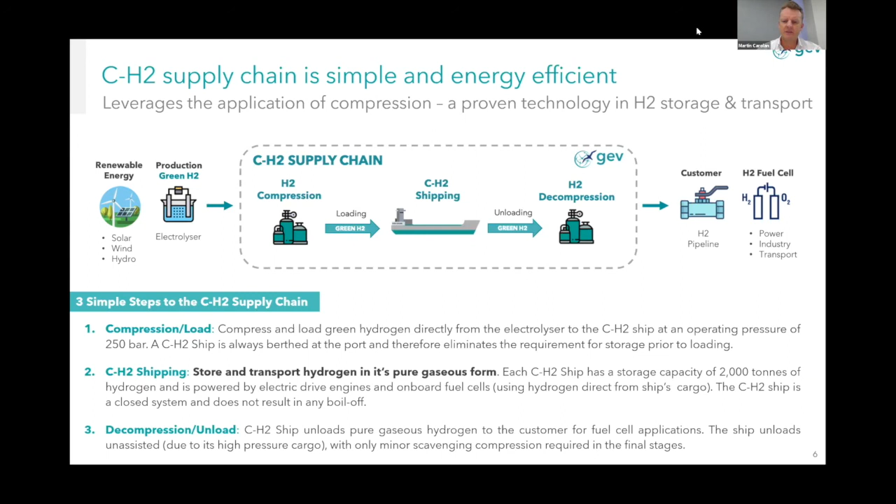To determine where we sit on a competitive basis, we looked at a recent study, announced two weeks ago and available on the ASX platform and our website. That study defined where we'd sit competitively, looking at volumes of 50,000, 200,000 and 400,000 tonnes per annum, and market distances of 2,000, 4,000 and 6,000 nautical miles. The conclusions aimed to determine the levelized cost of hydrogen, looking at end-use hydrogen for both the CH2 supply chain, an LH2 liquefaction supply chain, and NH3. I'll talk about some of the nuances of each shortly.

What we found, working with GHG on this, is that CH2 was viewed as a simple and highly energy efficient supply chain. It benefits from maintaining hydrogen in a pure gaseous form. Our technical barriers are really contained to the ship - we have a one to two year approval process we need to get through as the next stage. CH2 also has the attribute of being an ideal solution for the volatility in renewable generation, since it has the ability to load follow, whereas LH2 and NH3 processes need a steady state of supply.

You can see from this illustrative example of 200,000 tonnes that CH2, on a levelized cost delivered basis, was very competitive up to 2,000 nautical miles, and still competitive or in the mix reaching 4,500 nautical miles. Those distances cover from northwest WA up to the Northern Territory and down to Gladstone - key markets we're capable of delivering into.

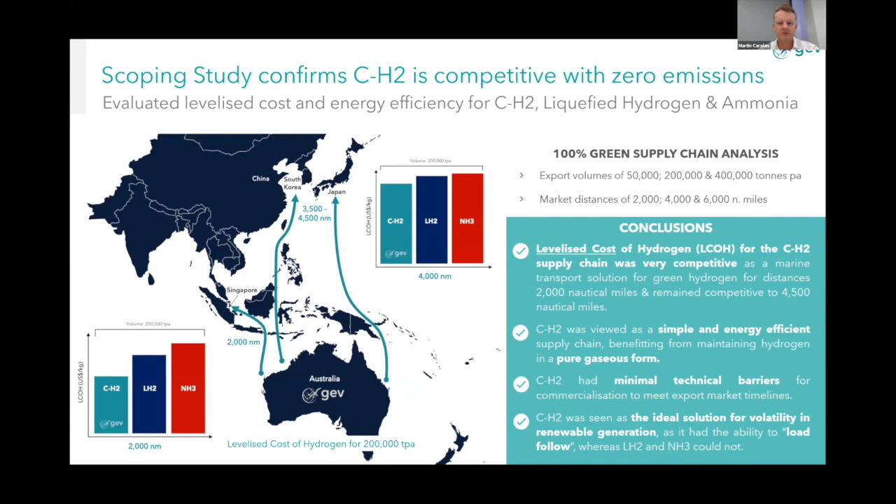A couple of key assumptions we need to emphasize: we're always looking at a constant supply of green hydrogen - we haven't focused on blue or other forms, purely green hydrogen. That hydrogen was provided by a third party at a constant pressure of 20 bar. At the loading location, we included certified green hydrogen and a green power grid to meet energy requirements for compression, liquefaction, or ammonia synthesis. Power requirements for ship propulsion and auxiliary power were supplied via fuel cells, powered directly by the fuel in the ship. So each of the supply chains needed to demonstrate a 100% green supply chain.

The key observations flow through from this graphic. First, all three supply chains start with compression, lifting the energy density up to the operating pressure required to run through their processes. Indeed, the pressure for liquefaction and ammonia is equivalent to the operating pressure at which we want to load and operate our ships.

We viewed liquefaction as adding quite extensive and intensive additional processes to get to storage at minus 253 degrees, and it also has a reasonable level of energy use in terms of boil off. From a shipping perspective, we haven't yet seen a scale version of an LH2 ship. There is some evidence suggesting boil off could be in the 1 to 5% range, so we've used 1% boil off in this analysis.

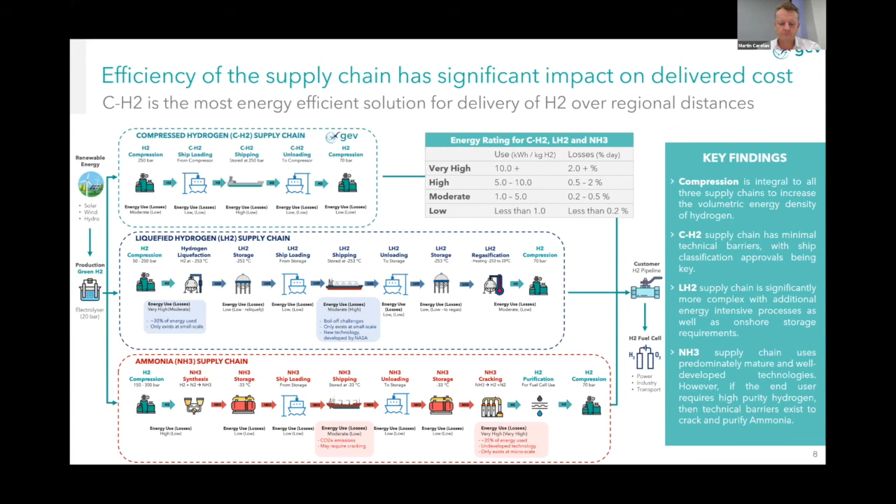So the next steps for GEV: we're now assessing renewable green hydrogen projects. We're either looking for partnerships for some of those announced projects referenced today, to review and potentially implement a CH2 supply chain, or looking to do a standalone project of our own to support construction of pilot scale ships. The graphic here shows that if we're focused on green projects supported by renewable energy, we're looking at projects from the Midwest of WA up to the Northern Territory and down across to as far as Gladstone or the Townsville area. So we're now in the process of starting to progress that.

In summary, if the Holy Grail is to have an energy source produced from a renewable source at point A and delivered to point B, it's our view that the full supply chain should be, one, as efficient as it can be, and two, also utilize an emission-free process. So with that, we are now heavily pursuing our supply chain, and we'll be making further updates to the market in terms of our progress with partners, and also evaluating further technical partnerships as we move forward.

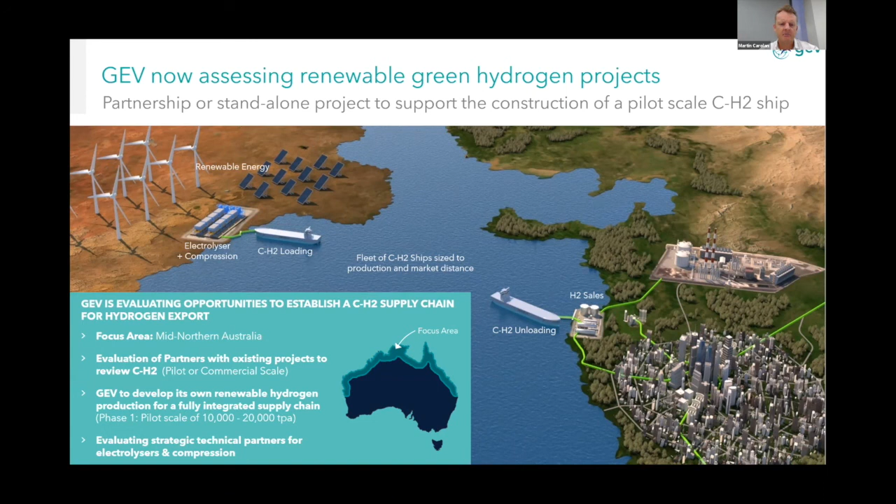The last comment I wanted to leave with the group is that we've also been talking to people in Europe about an offshore green hydrogen transport solution. It hasn't been discussed today, but there's obviously extensive offshore wind renewable installation and capacity taking place, whether across the UK, Germany, down through France and Spain. So we're seeing significant build-out of offshore wind farms across Europe. Not all are going to be able to connect directly to the grid, and in some instances, the grid just cannot take that capacity.

So discussions have started to take place: perhaps you convert that excess capacity into the form of green hydrogen. Then the question becomes, how do you transport that to shore? In instances where we're talking much shorter distances, we think compression has an even greater role to play. Where subsea pipeline cannot work, or subsea electrical cables back to shore don't work, we're now starting to talk to companies looking at these offshore production facilities, which combine electrolyzer and compression. We would simply build out a smaller ship size and a fleet of ships that could load in an offshore environment, sail to shore in half a day, and unload that compressed hydrogen in its green format.

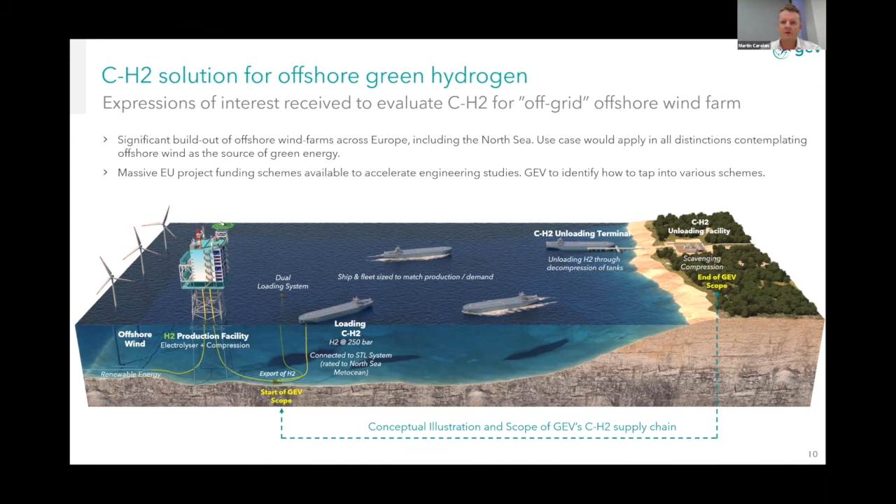So clearly the advantage of compression really flows through on short distances in this regard. To put forward ammonia-type solutions, or indeed liquefaction, would simply be too challenging, too complex, and too costly for such a short distance. We'll look to see how that progresses over the next coming months as well. So with that, that's the end of our presentation. For anyone who wants to look more deeply into our announcements and the scoping study we released, it's available on our website, gev.com, and also on the ASX platform, and we'd be happy to take questions.